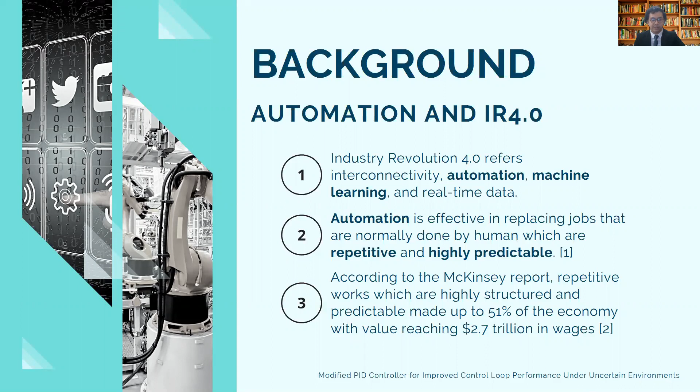Currently, the world is moving towards IR 4.0, Industrial Revolution 4.0, where we focus more on automation and machine learning. In automation, machines are replacing jobs normally done by humans that are repetitive and highly predictable. According to a McKinsey report, repetitive work which is highly structured and predictable makes up to 51% of the economy, while the value reaches 2.7 trillion in wages.

So how do we control a process, or do the automation? In the industry, especially the chemical industry, we use PID controllers. Before this, in the early 1960s, the PID controller was used to replace the relay, which was previously used for automation control purposes. PID is a control algorithm that consists of proportional, integral, and derivative coefficients, where u(t) is the output of the PID controller, consisting of the proportional coefficient, the integral coefficient, and the derivative coefficient. We'll see more on how this works in the literature review next.

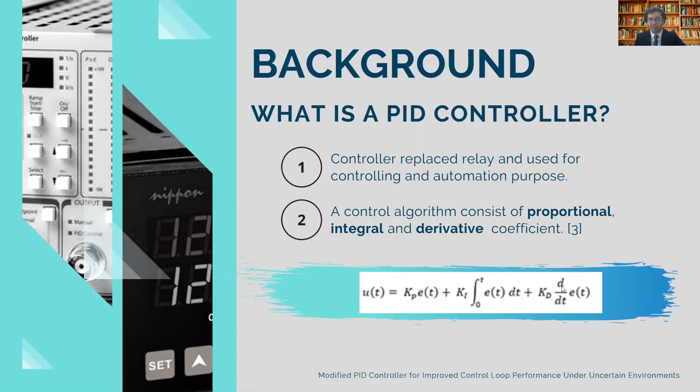Now, how is the process controlled? In industry, most processes are controlled by control valves. A control valve is used to control fluid flow by varying the size of the flow passage. So when controlling a flow system, say the fluid is liquid, we manipulate the flow passage area inside the control valve to control the flow rate. In the chemical industry, control valves are mostly used to control flow, temperature, pressure, and also the level of liquid inside a tank. For temperature, we usually control the flow of hot fluid or cold water used for cooling or heating the process stream.

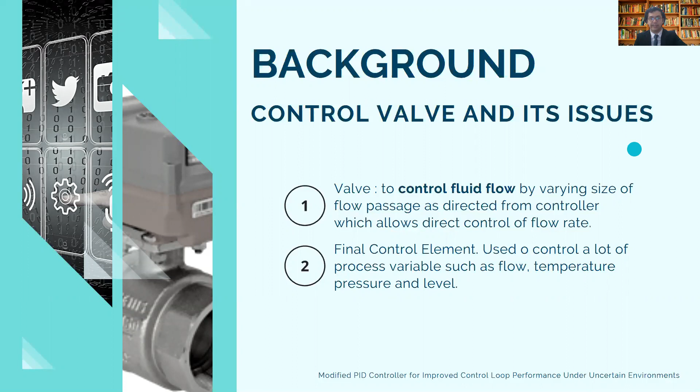Let's move to the problem statement. What are the issues with control valves and automation? We have identified that in a control loop dealing with control valves, there are problems regarding non-linearities, such as backlash, hysteresis, and stiction. We'll talk more about that in the literature review section.

Another problem is oscillatory feedback control loops, which cause variability in the process variable, creating lower quality products and other bad effects on the process stream. 30% of oscillatory feedback control problems are due to valve issues, which is a big percentage. More than a quarter of the problems are about control valves, and nearly 25% of frequent problems addressed by control loop performance are regarding stiction. We'll talk more about stiction in the next section, so just to inform you, my study will focus more on stiction.

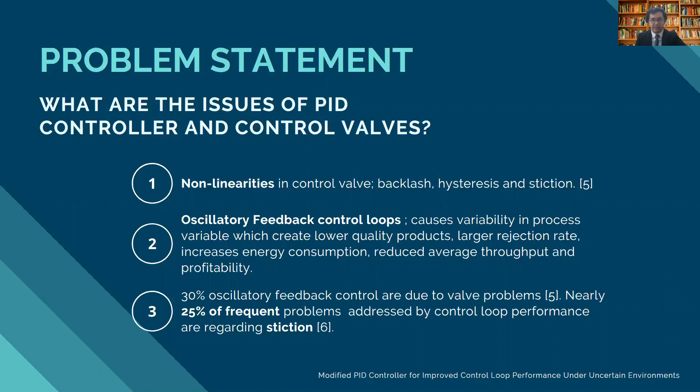Inside an automation process plant, the main components of the control loop consist of the controller, actuator, the process, and the sensor. The control valve is regarded as part of the actuator, and a sticky valve will have to be replaced. Usually, when there's a problem of sticky valve, it needs to be replaced either immediately or at the next scheduled shutdown.

As you can see in this bar chart regarding problems addressed by control performance monitoring, valve stiction is considered the second most frequently addressed problem. Even though the first problem is wrong tuning settings—which we know in industry can be solved by auto-tuning—valve stiction requires the change of valve or modifications to the PID itself. That's why this is my motivation for choosing valve stiction and designing a PID controller to perform under valve stiction nonlinearity.

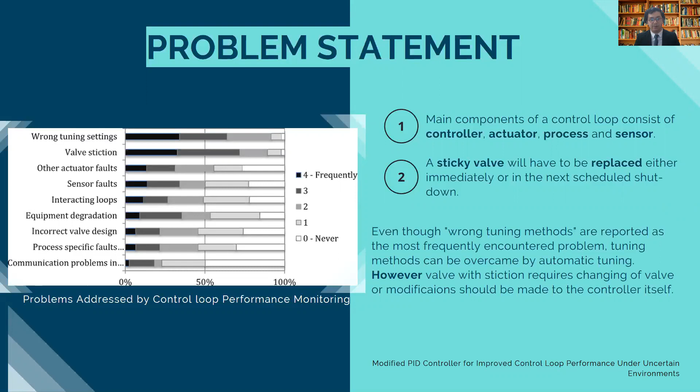The objective of my research for FYP1 is to develop a PID-based stiction compensation method to minimize the effect of stiction on process outputs. This means the PID controller is able to perform well even though we detect there is stiction inside the process.

And next is to test and validate the performance of the proposed method using a simulation case study.

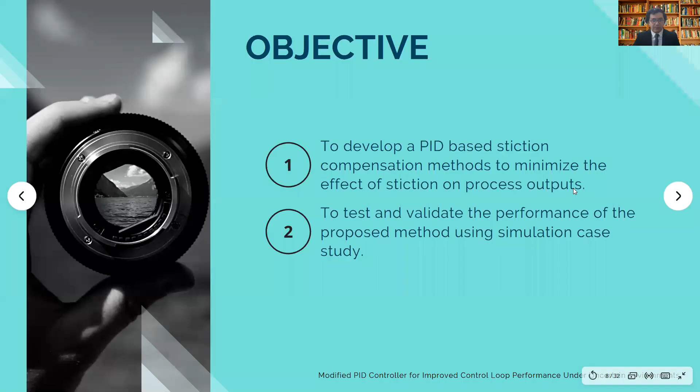My scope of study: the first one is about control valve nonlinearities. So my first scope is to understand what the nonlinearities inside the control valve are, which I had identified several, namely deadband, hysteresis, and also static friction.

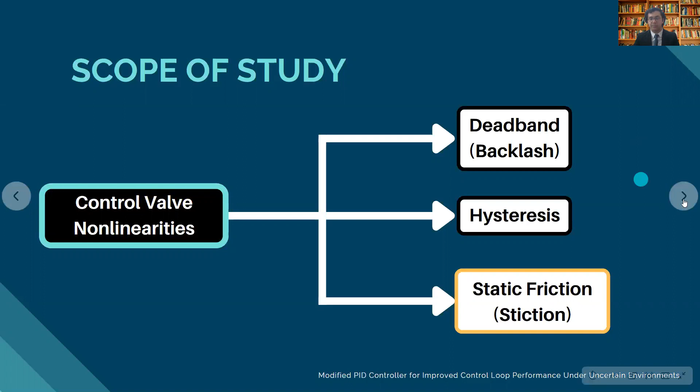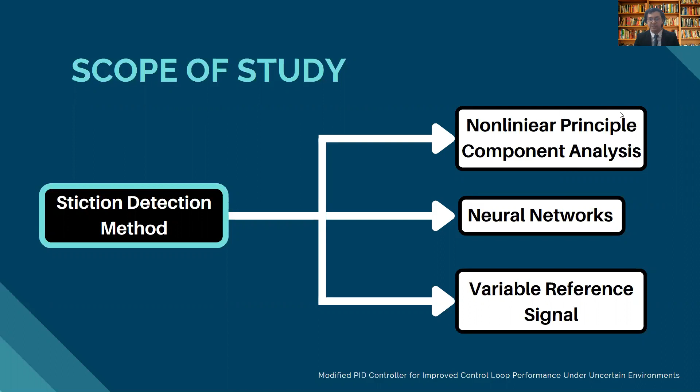The next one is to identify the detection method for stiction. The detection methods which I had researched are nonlinear principal component analysis, the neural network, and variable reference signal. The next one is to design and model the PID, which will be done through MATLAB and Simulink.

Literature review: I'll talk mostly about the control valve nonlinearities, stiction detection methods, understanding the PID controller, including what methods exist to compensate for stiction nonlinearities in a PID controller.

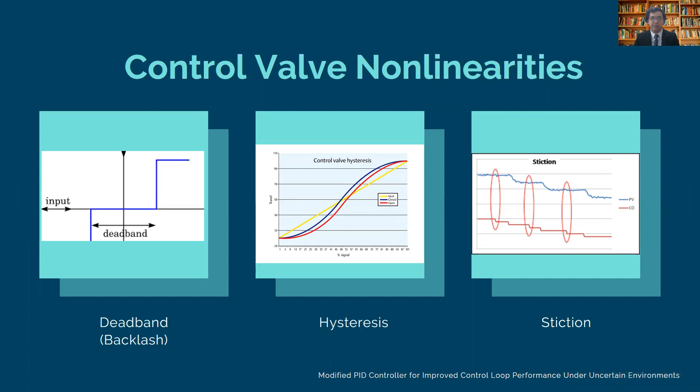There are three types of control valve nonlinearities: deadband, which is also called backlash in the industry, hysteresis, and also stiction. When we talk about deadband in process instrumentation, it refers to the range through which an input signal may be varied upon reversal of direction without initiating any observable change in the output signal. As you can see in this graph, it depicts the deadband.

Deadband happens when, let's say, we are controlling or turning the valve, but there is no change in the output of the process. So we control the mechanical movement, the stem of the valve, however, when we control the stem, it does not change the area inside the valve which is used to control the flow. That is the definition of deadband.

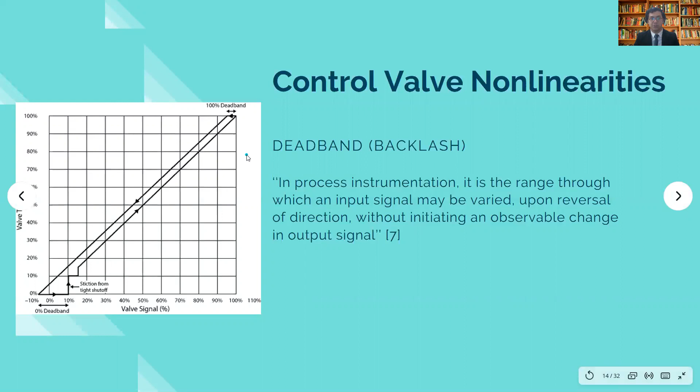Next one is hysteresis. Hysteresis is a property of an element evidenced by the dependence of the value of the output, for a given excursion of the input, upon the history of prior excursions and the direction of the current traversal.

As you can see here in the graph, the first one is the yellow line, which depicts an ideal linear control valve. However, if hysteresis happens, as you can see here, the relationship between input and output looks like this.

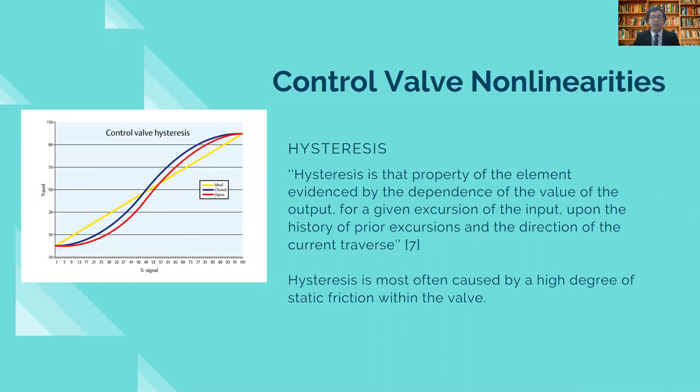The next one, the main focus, is stiction. According to the Instrument Society of America, stiction is resistance to the start of motion, usually measured as the difference between the driving values required to overcome static friction, upscale and downscale.

Let's look at the graph here. Usually, deadband, which we talked about earlier, happens together with stiction. So stiction is the short-term word for static friction.

When we talk about friction, there are two types: static and dynamic friction. Usually, before a valve is moved, it needs to overcome static friction, and that's why sometimes it needs more than the usual amount of force to allow it to move, before it moves according to dynamic friction. This problem causes a lot of oscillatory feedback control problems inside the control loop.

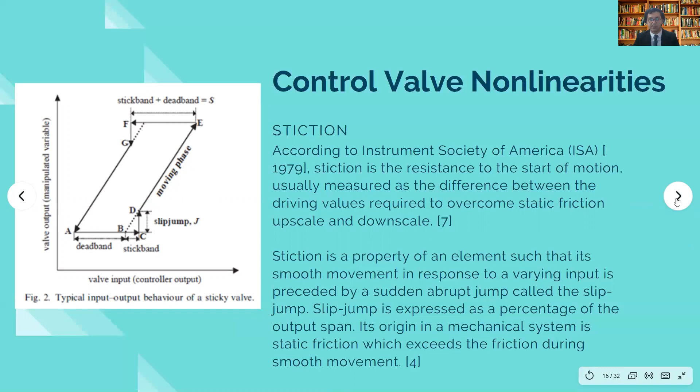So my research mostly will be done to compensate for this kind of nonlinearity inside a control plant, inside a process plant. Next one is the stiction detection methods.

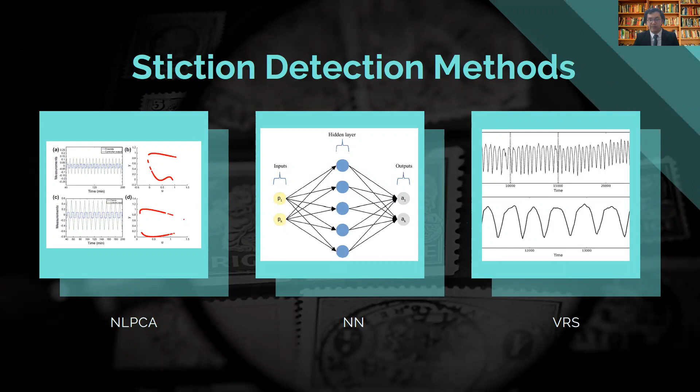I had identified three, which are NLPCA, neural network, and also VRS. The first one is nonlinear principal component analysis. This uses the relationship between the shapes of the signal.

So let's say we have a signal, the shapes of the signals are identified, so we can identify whether this is stiction or not. Usually this is done by using the operating data of the control variable and controller output.

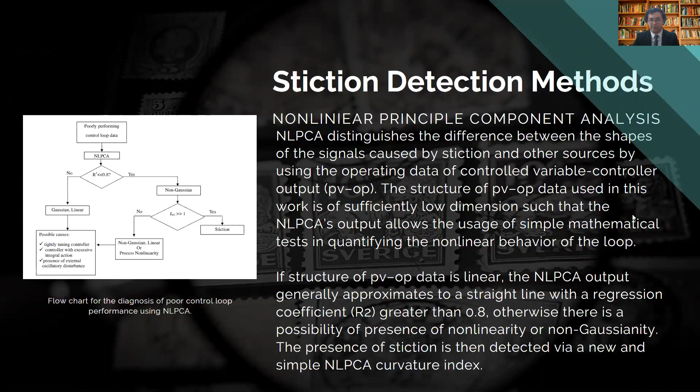So we compare within the control variable, and we compare between the control variable and also the controller output for the nonlinear principal component analysis. And the next method is using a neural network.

Neural network is one form of artificial intelligence which consists of three layers. The first one is the input layer. If you want to know more, neural networks are used in face detection in our smartphones. It is trained to learn the patterns of the control system.

Usually inside the neural network, we give an input, let's say data on process variable and also controller output. If there is a stiction, we have an input layer, it will be processed through the hidden layer, and then it will go through the output layer where it gives us information or feedback that, let's say, this is a stiction.

In case of the input layer, if we give an input which is non-stiction and it identifies as stiction, we could give a backward propagation to give feedback to the neural network, teaching it that this is not the answer. This method is called the backward propagation method, and it is considered under supervised learning.

The next one is the variable reference signal. Inside the variable reference signal, the slope of, let's say, the control valve, the PV and also OP, is calculated, and then it is referred to the stiction index.

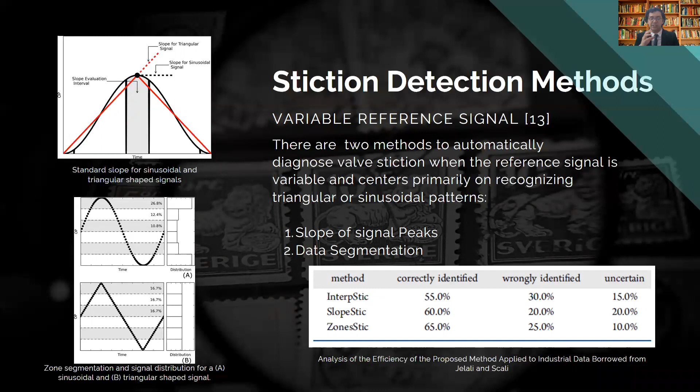Next, we'll talk more about the PID controller. PID controller stands for proportional, integral, and derivative, and these controllers are designed to eliminate the need for continuous operator attention. Usually in the traditional controller, the controller only consists of one coefficient, which is P.

For each coefficient, there are advantages and disadvantages. In a P controller, it's usually good for reducing offset and also has a simple design. However, the offset cannot be removed, and when the error is 0, the output of the controller would be zero, and hence it cannot produce a continuous output.

When we combine P and I to become a PI controller, the advantage of the integral part is that it removes the offset, so it will reach the set point that we set on the controller. However, the disadvantage is that it takes a longer response time and may produce oscillation.

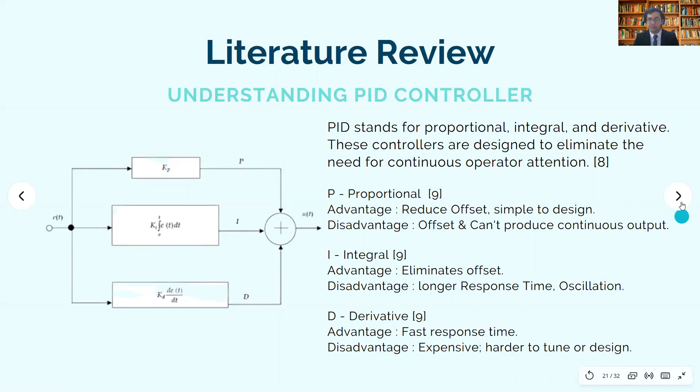So let's go to the next slide. We have a graph, and we see the different effects when a step change or disturbance is introduced into the control loop system. We see that the P controller tries to respond to the disturbance, however, there is an offset.

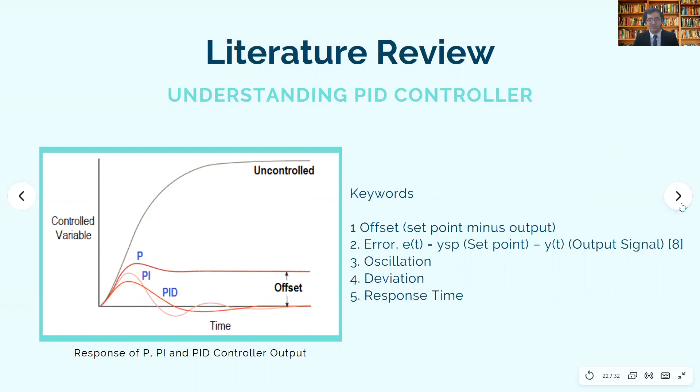The PI controller is able to remove or reduce the offset, to eliminate it. However, it takes a longer response time, and the PID controller is able to do the same as the PI controller but with faster response time. Next, let's say one of the disturbances is stiction.

So the next part is to present more about the methods which are used to compensate for stiction-based disturbance. The first method is fuzzy gain scheduling of a PID controller.

In this method, we apply a fuzzy block diagram, a fuzzy term inside the block diagram, which is used to tune the three gain parameters, Kp, Ki, and also Kd, the coefficients of the PID controller, at runtime. The self-tuning fuzzy inference system is used to always update the Kp, Ki, and Kd of the PID controller.

From the results, it is shown that the fuzzy gain scheduling of PID controller outperforms the classical PID controller for all explored cases, effectively managing stiction-based oscillation in the control output. So during these next two or three weeks, I will focus more on the compensation methods.

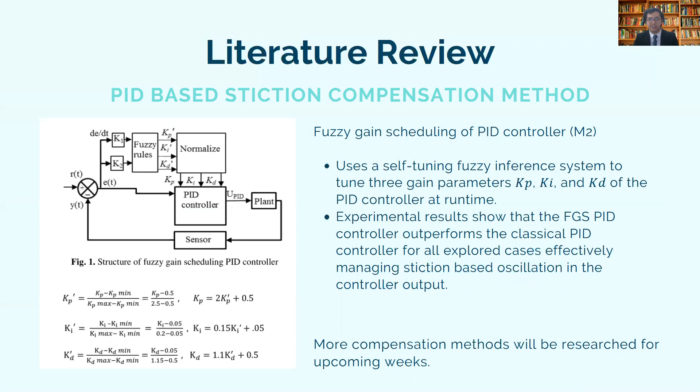And the next method to compensate for stiction-based problems is the two-move method. Inside the two-move method, we add a compensator to the controller. The first move pushes the valve stem to a steady state position, while the second move forces the stem to stay in that steady state position.

We know from the literature review that for static friction, we need more force to move, because static friction is much higher than dynamic friction. So inside the two-move method, firstly we apply a larger force for the valve, and then only we tweak the valve, reducing the force.

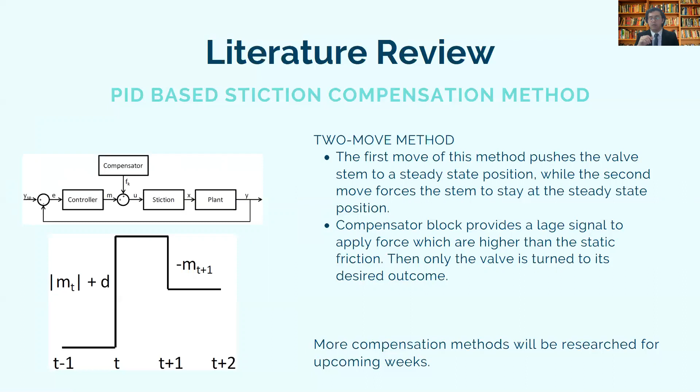It's not reducing the force, but applying a backward force to push the valve to a position set by the controller. For example, let's say we want the area to be at 2 cm cube. Since there is a stiction, we apply force so the area opens at 3 cm cube. Then we tweak the system and apply a backward or opposite force to push the valve, so only 2 cm cube of area is open for the control valve.

From the literature review, I would like to compare between backlash and stiction and also detection methods. The deadband is usually hard to differentiate. Manually, it is possible to differentiate between deadband and stiction. However, in the model, it is quite hard to differentiate because usually they happen together.

We had identified 3 methods to identify stiction inside the control valve, which are neural network, NLPCA, and VRS. So as a summary, for control valve nonlinearity we identified 3 types: deadband, hysteresis, and stiction. For the stiction detection method, we identified 3: nonlinearity principal component analysis, neural networks, and variable reference system.

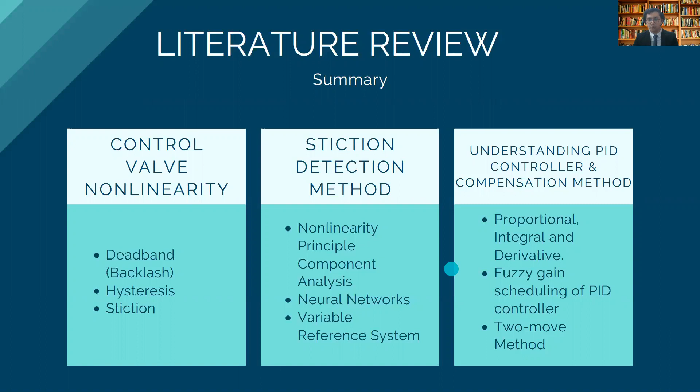So these are the methodology of my research. The first part is the literature review, where I study more on current researchers inside the industry, and also identify the types of nonlinearity, identification methods, and compensation methods.

The next one is modeling and modification. Based on my studies on the literature review on the compensation methods, I will try to model and modify the PID controller to anticipate and compensate for stiction nonlinearity.

Next part is to test the performance. Firstly, I will introduce a non-stiction disturbance into the system to test the PID controller performance, and also compare between the methods that I found and modeled before, to test the performance of all the methods.

Also evaluation, to analyze and compare the difference between modified and unmodified PID controller under stiction, together with the documentation.

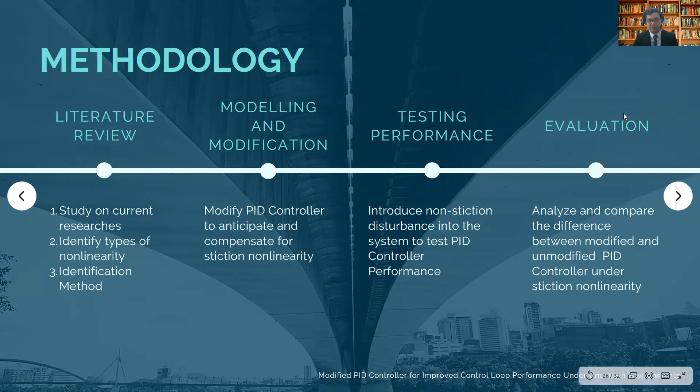And this is my Gantt chart. My Gantt chart is based on my methodology, where I divided into 4 sections, which are literature review, modeling and modification, testing performance, and evaluation and documentation.

For the modeling, I am determined to start the modeling by week 8 of this semester and finish by week 5 of next semester, followed by the testing performance and also the evaluation and documentation, which is done throughout FYP I and FYP II.

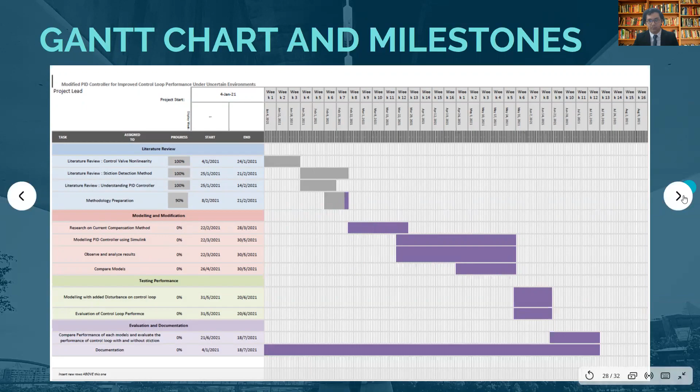As a conclusion, for next after the RPD, the PID controller will be modified to be able to compensate for stiction nonlinearities and to perform under stiction nonlinearities. So that is my focus for next after RPD.